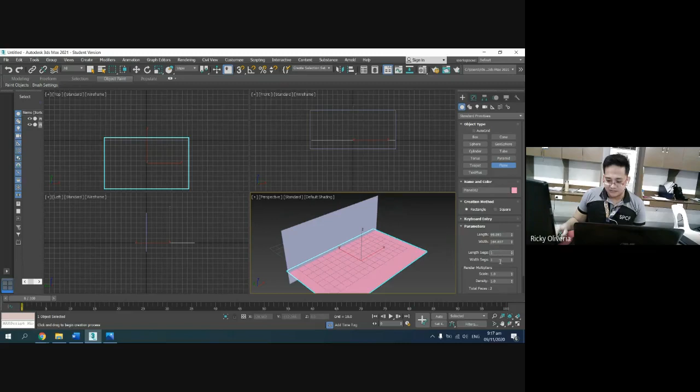We have a reference image. So here, I'm going to switch the length segment to 1 - why? So that the lines disappear. Then I'll have another one here. Okay, then this is also one. And I'll have here - okay, and that is also 1.

So I have this kind of shape for the plane. This is like what we're doing - it's like these are the walls and so on, but inside here, this is the area where your model will be modeled. This is where our object will be modeled.

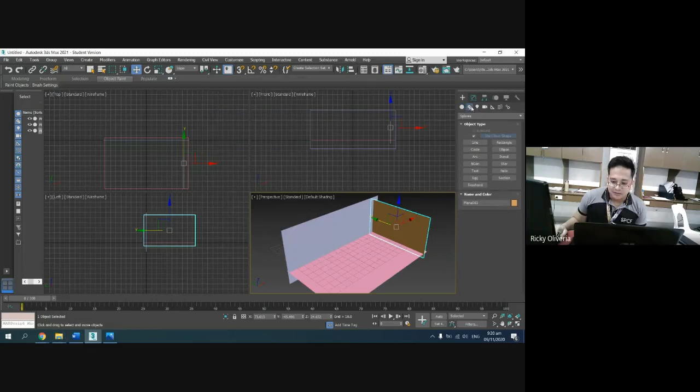Okay, so under the modify panel, the height would be - it's too big if I use 517, it's too big. So instead, we round it to the nearest hundreds or tens. So the height and width - let's start with width, it would be 35.9.

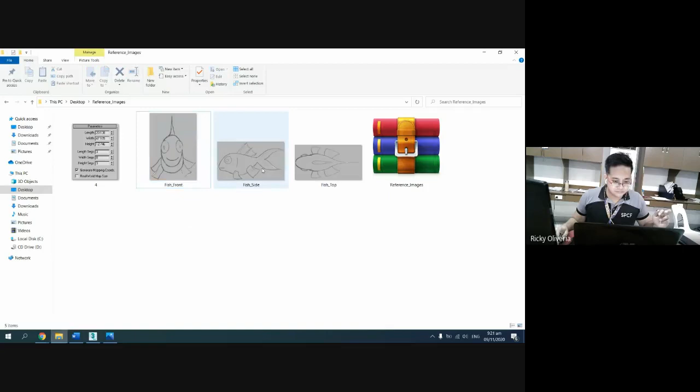So we don't need to copy the right part or the left part anymore. Let's see the details. So this is the height, 47.2, and the width is 82.

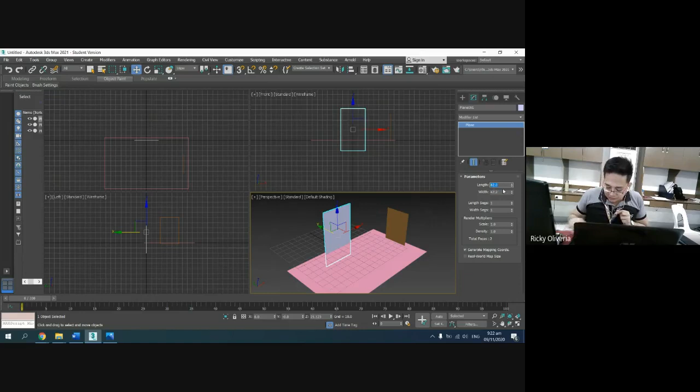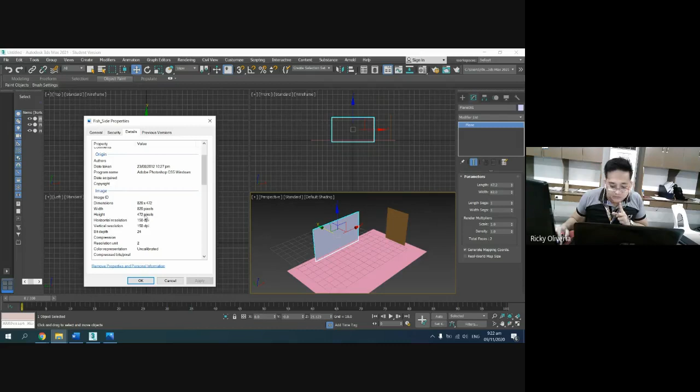Wrong, it's reversed. This is... okay, and for the last one, 82. So 82, 47, correct. And the last one, this one, it would be

details with 81.9. This is 81.9, and then 42.9.

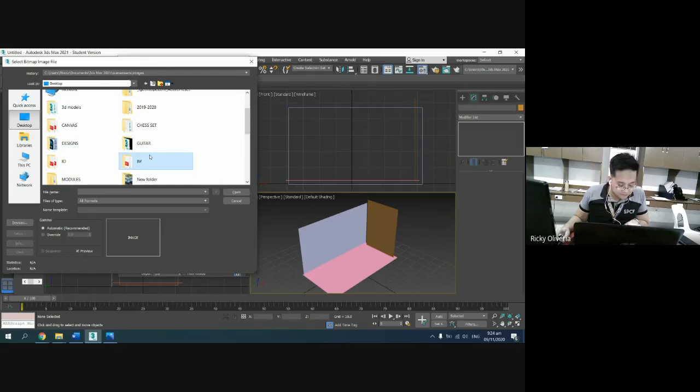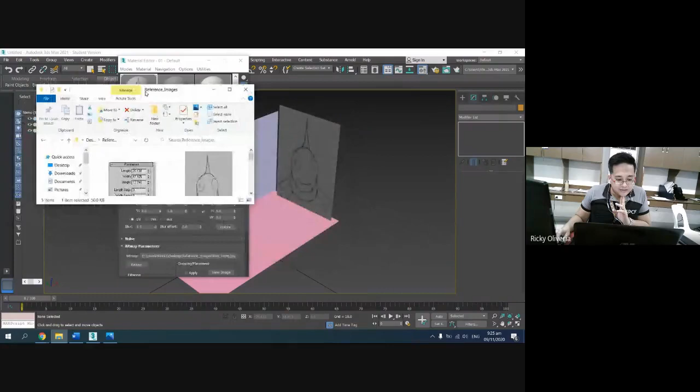Let's find the reference images. Where is it? Front. So let's drag it here. We're going to compare this to our image from earlier. If we compare, they're the same, because we follow the same dimension.

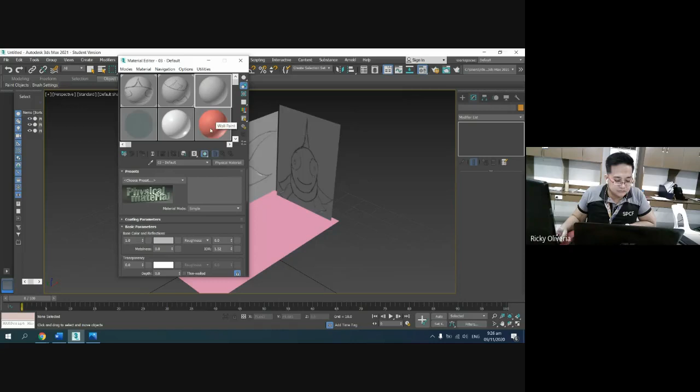Okay, since that's fine, let's have this one, Physical Material again, and here, have Bitmap. This one too, in here. And the last one, Physical Material, then okay.

Okay, any questions so far? None?

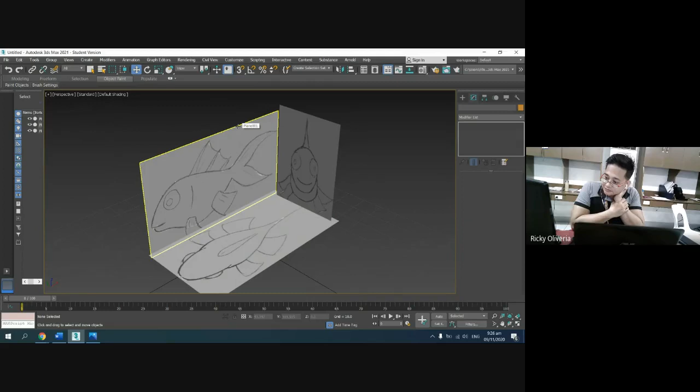Okay, now once we're okay here, what we're going to do is put this at the center. Now we're going to have a box - we're starting to mold our fish.

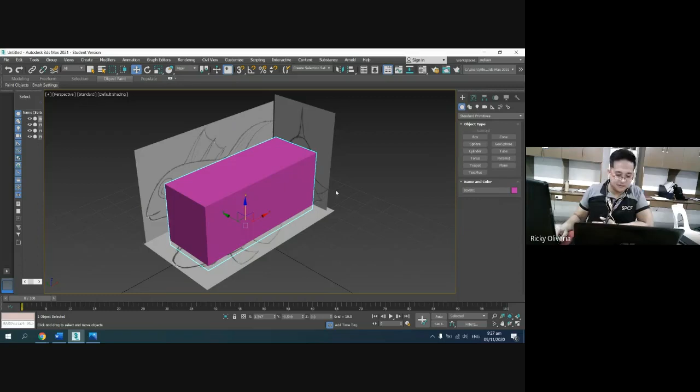So in here we have a box. Any size will do. Okay, so let's change the color first, it's too bright. Okay, here.

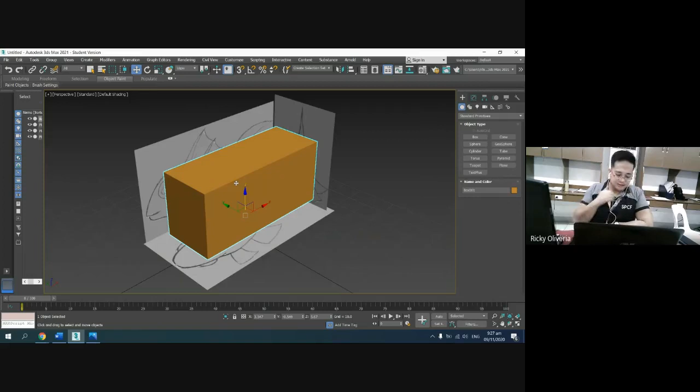This one, we're going to follow this. Okay, but using the absolute value now, so we won't take the decimal point. So let's have 20, 47, and 12.

Okay, click on the box. Let's have 20, 47, and then let's have 12. Okay, then segments would be 3, 8, 3. So this is the segment.

The length is 3, the width is 8, and the height is another 3. My mouse is lagging.

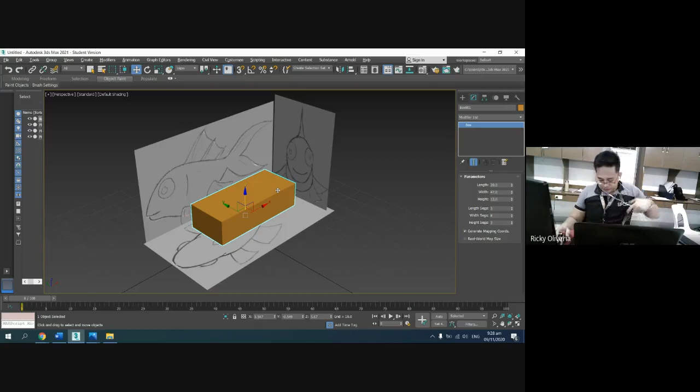Okay, now for you to see, for you to view your segments, hit F4. Just F4 so we can view and see the segments. Now what we're going to do is rotate this by 90 degrees.

So here, let's see what's moving - it's the x-axis. So switch this to 90 degrees so it stands like that. Okay, then that's it.

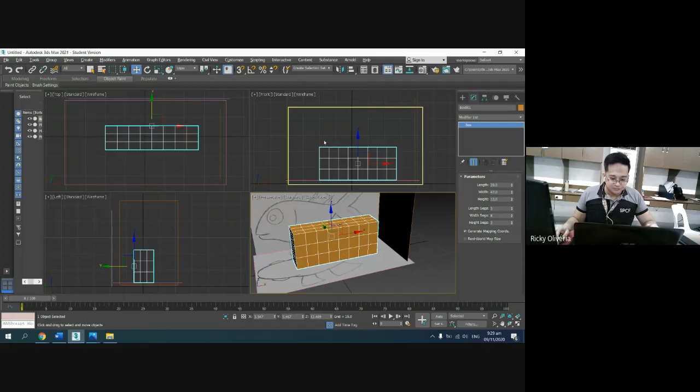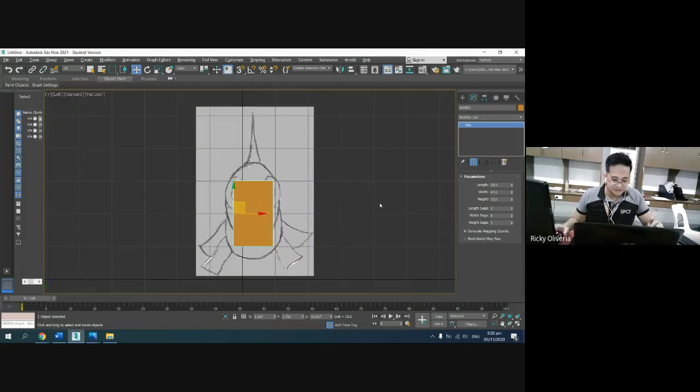But on this left view, let's maximize it so we can see it better. So here, it's in wireframe, so let's use flat color so we can see this. Then we'll just place it here in the middle.

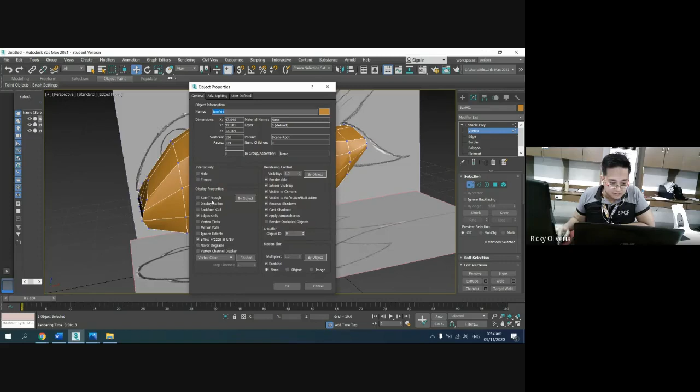Ito na. So, kapag tinanggal natin yung object properties na tinanggal natin, okay, yan siya. Okay, so next, balik lang ulit natin siya.

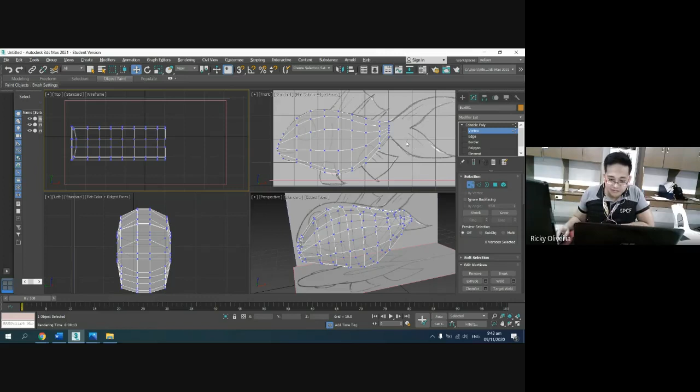So, since okay na tayo dito, ibabaw naman. Okay, question so far? Wala. Okay, hindi muna natin ito i-delete kasi kakailanganin pa natin yan later on, no? Okay, so here, ito naman tayo. Gawin natin flat color ulit to.

Let's access the wireframe, F4. Okay, so ito siguro ang gagawin natin is we are going to have this at the middle. Pagtikitin lang natin siya, ganyan. Okay, tapos here, we could do this.

Okay, as you can see, hindi pa rin naging exploded yung mga wireframe ko, no? Kasi I am following the one direction at a time na how are you going to model this, para at least hindi magkakaroon ng explosion yung wireframe natin. So here, careful lang ako na hindi sila mag-overlap. So this will do.

And then here, ito rin. Okay, so here, once na okay na, pwedeng kunin natin to, ganyan natin. Okay, now to check this, ito na yung nagiging itsura niyan ngayon. Okay, compare mo kanina, no? Okay, medyo iba na yung itsura niya, no? Okay, now here, since okay na ako dito, ito kasi babalikan pa natin to.

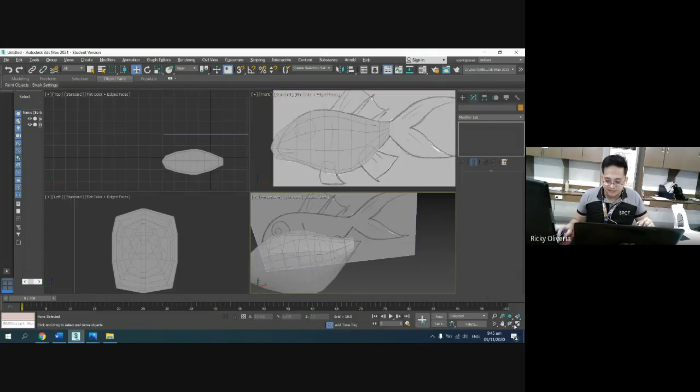Now, what I'm going to do is I am going to slice this at the center. Kailangan i-slice ko siya sa center, since yung kalahati parehas lang. Okay, so paano yun? I-click yung object natin. Okay, under polygon, you'll see slice plane. Hanapin lang natin sa slice plane. Yan, ang ginagawa ni slice plane is it would going to slice the object that is currently selected.

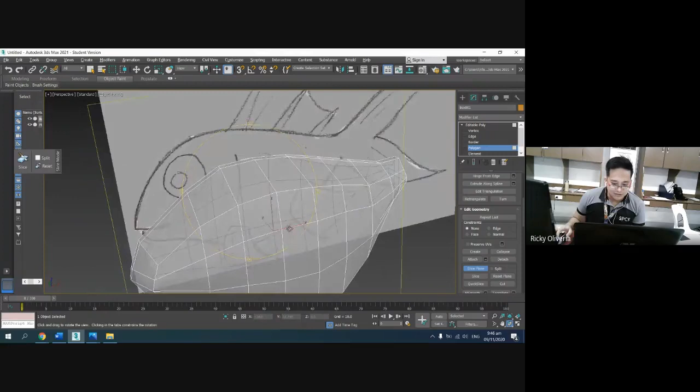So halimbawa, ito, look at this one. Yung parang square dyan, yan yung gizmo natin. Yan yung mako-consider nating knife, yung knife natin. So look at this. Ayan, so halimbawa, all my polygon. Okay, Control A ko lang siya para lahat selected. This my slice plane, this one.

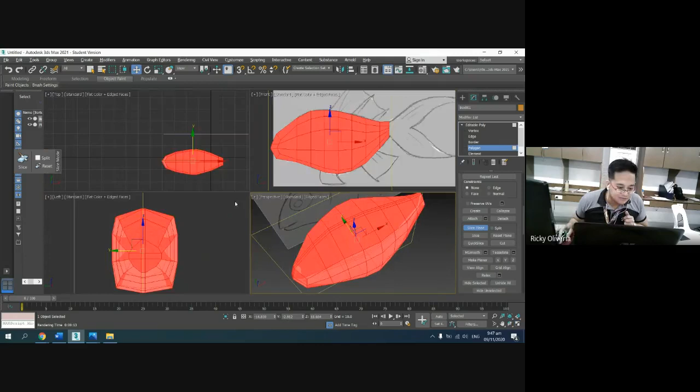Ayan, oh, look at this. So, kung mapapansin natin si slice plane, ayun, oh, yung gumagalaw. Yan yung tatamaan niya, ibig sabihin yan yung makakat niya. Lahat ng selected natin, makakat yun. So ito, kukunin ko lang yung parang bandang gitna niya. So for me to have this at the center, pwede kong tignan si top view. Okay, para mas center, pwede namang estimated lang. Okay, walang problema, okay so here, then I'll just click slice.

So tignan nyo to, example din. Pagka ang slice kasi, ayan no? It would simply slice, no, as it is. So click ko lang, slice. So, tanggalin ko na. Ayan. So magli-leave siya ng

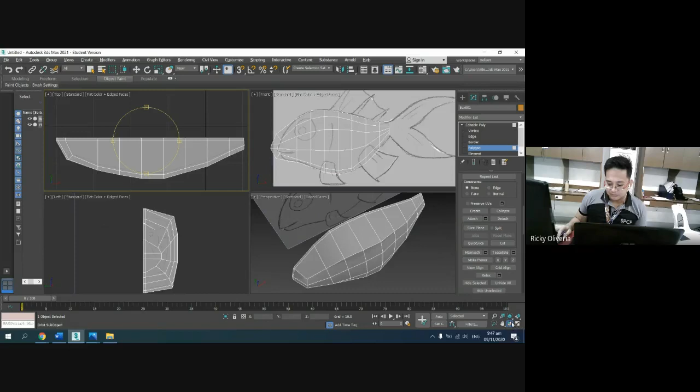parang another wireframe, no? Okay, once done, select ko yung kalahati, this one, then I'll simply delete this. Make sure na walang matitira. Okay, what will happen is, ito na yung itsura niya ngayon. Yan yung itsura niya ngayon. Okay?

Now, using vertex, no? Pwede kong palitan to, pwede kong habulin to, okay lang, pwedeng okay naman na yan. Since kasi ginalaw natin sa taas kanina, so mag-iiba talaga yan ng konti.

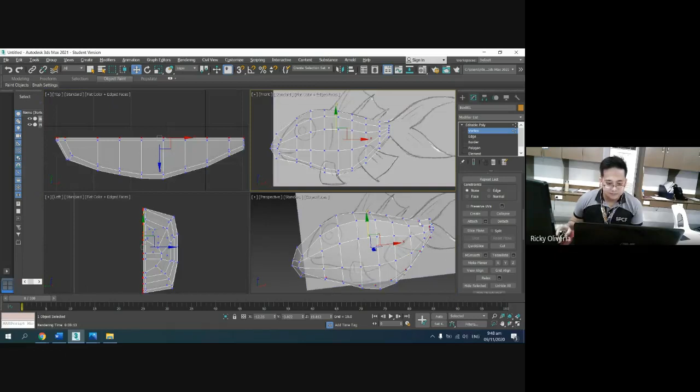Okay, now I could now drag out the tail, yung buntot. Gagawin ko na ngayon yung buntot. Okay, so here, so using the perspective view, no?

So I would have this, oops. Okay, so sinelect ko yung kalahati. So I could have, tansya lang to, no? I could have extrude this into 4 times, no? Pwede ko siyang extrude ng 4 na beses. So here, titignan natin yung haba ng pagkaka-extrude natin in here sa front view,

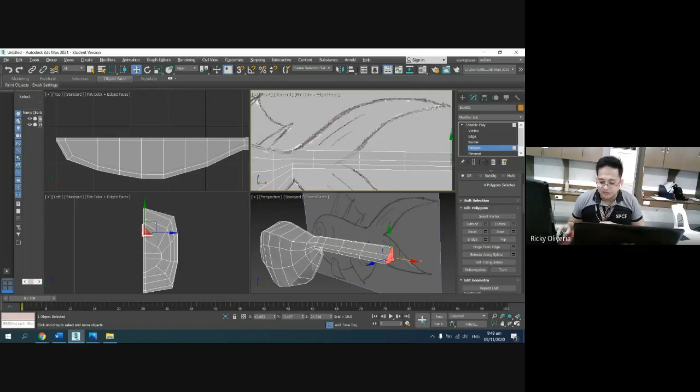which displaying the side of the fish. Then, yung extrude natin, ihilahin ko siya dito sa perspective para makikita natin. Okay, so extrude. 1, 2, 3, and 4. Yan, so you could have 3, you could have 2, pero baka kasi medyo mahirap. Mahirap na siyang i-bend pagka ginawa nating 3 less than 4.

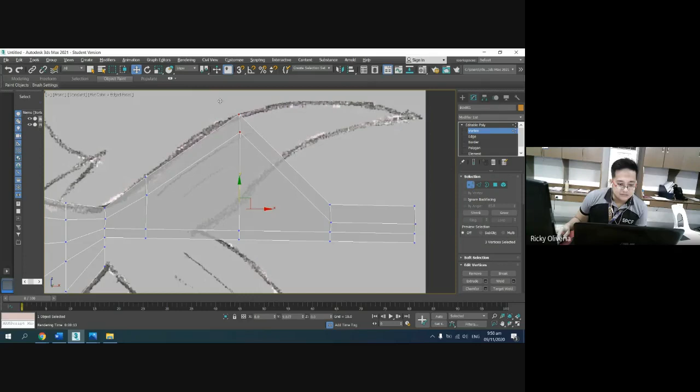Okay, so next is here, mold na natin siya kagaya ng ginawa natin dun sa katawan. So using vertex, just going to move this. Ay, dalawa sila. One.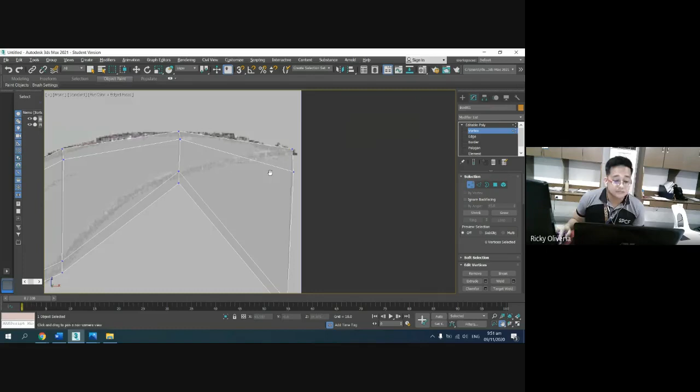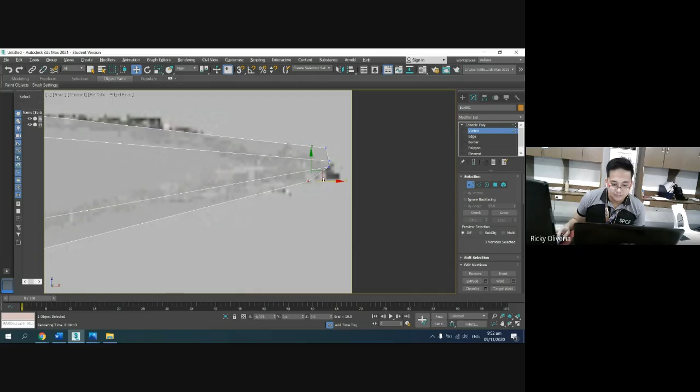So here, magkakaroon tayo ng overlap dito. So kailangan natin gawa ng paraan to. Okay, so ito is lagpas lang natin ng konti yan. As long as hindi sila mag-overlap. So here, okay na tayo dito. We could do this.

Okay, next is yung other naman, no? Ganon din yung procedure dyan. Okay, ganon din yung procedure. So, we're going to select this again using polygon. This. And then, using again, extrude.

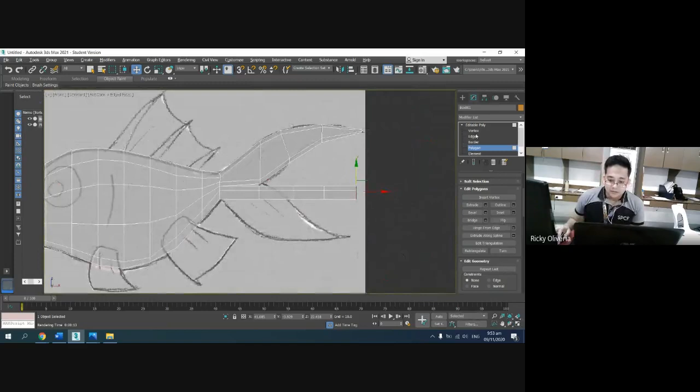Tignan ulit natin siya dito. So, 1, 2, 3, 4. Ito naman, no?

Ito kailangan hindi sila mag-overlap. So, pwedeng ilagpas mo ng konti, pwede rin pantay. Okay lang kahit hindi natin tamaan masyado yung ano natin dito.

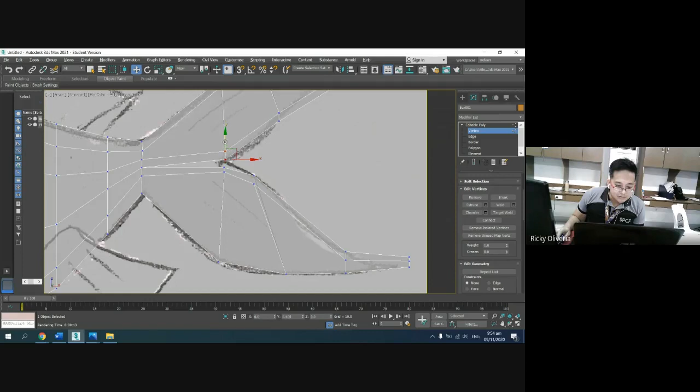Okay, so once done, ganito yung magiging itsura niyan. And ito yung itsura niya sa perspective natin. Okay, so here,

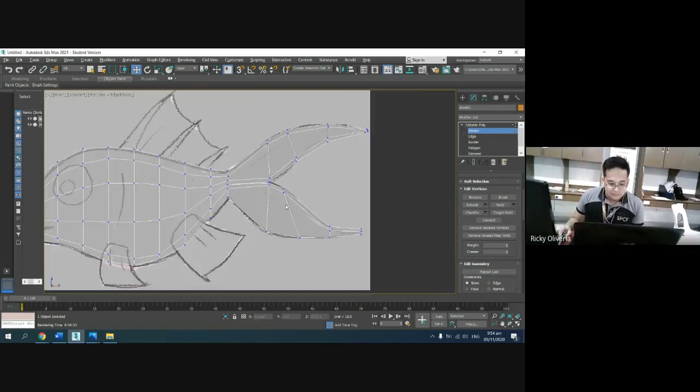Naririnig nyo ba yung kanta ni Ma'am Liz? Ang pangit, no? Lakas na daw.

Okay, so, after this, okay na, no? Pagka tinignan natin siya, object properties, no? Pagka tinanggal natin siya sa pagiging see-through, ayan na siya, no?

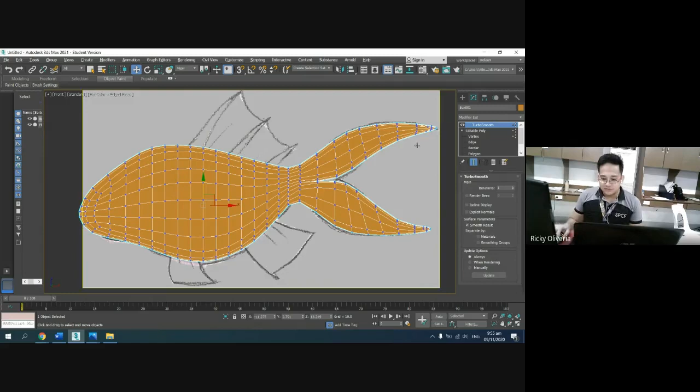Now we will apply a modifier para maging makinis yung model natin. And this modifier is called Turbo Smooth. So, Turbo Smooth, where's that? This one, no? Yan. So, once we apply a Turbo Smooth, ayan siya. Okay? Ayan na siya. Okay?

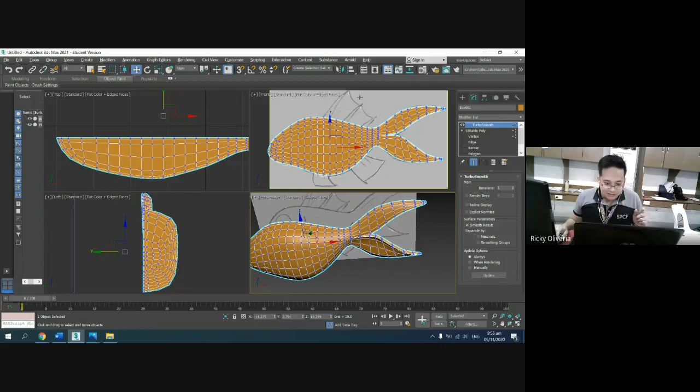Since yung kalahati niyan parehas lang, hindi na tayo mahirapan. Okay? Now, kunin natin tong ilalim at yung ibabaw. I-activate natin yung Turbo Smooth. Ayan lang, click lang natin yan.

So, balik natin yung object properties natin into see-through. Okay, halos pare-pareho lang yung way kung paano natin huhugutin itong mga ito. So, how? Dito sa ilalim, kunin natin muna ito. So, hindi natin siya pwedeng kunin dito kasi magdidikit siya dun sa kabila pagka dinuplicate natin. So, instead of kukuha tayo dito, gagawa tayo ng panibagong wireframe.

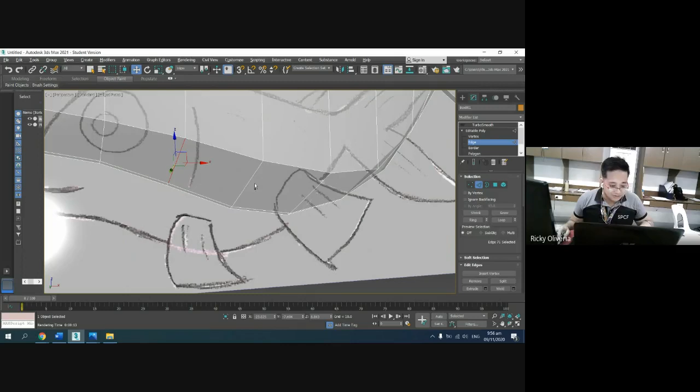So, using edge, let's have this one. Hold control para ma-select natin yung dalawang yon. Then, we could use connect. Yan, no? So, yan siya. Meron na tayo. Okay, so, paano kung dalawa yung kailangan natin kunin? We could use connect settings then two.

Okay, since hindi dalawa ang kukunin ko, pwedeng dalawa yung kunin nyo, pwedeng isa lang. So, dito ko na siya kunin sa edge dito. Dito ko na i-extrude yung fin niya, ito yung fin niya dito. So, using polygon, extrude tayo. This one. Kahit mga tatlo lang siguro. 1, 2, 3. Ayan, so once extruded, ayan siya.

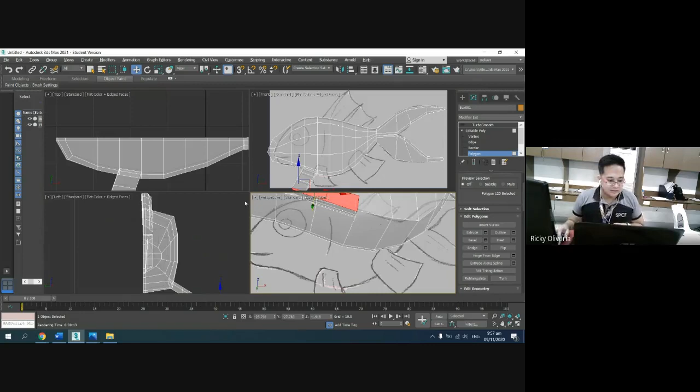Masyado palang maano yung ano. Ito dapat banda sa may ilalim. Okay, so ulitin lang natin, dapat yung edge dito, hindi ko na-tansya. Connect. So here, I could have polygon ulit. So extrude 1, 2, 3.

So here, and using vertex, I could just adjust this, here, here, here.

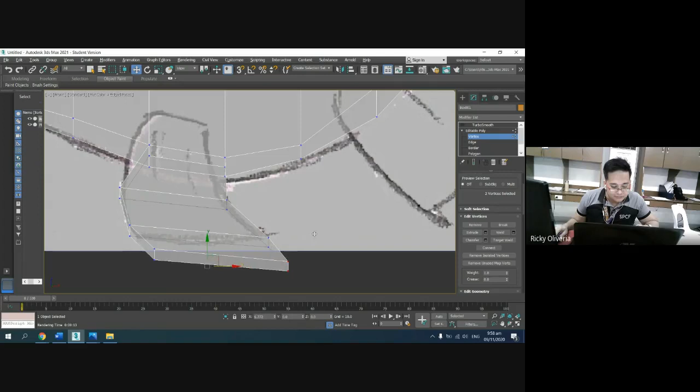Tapos, pwede nyo na siyang tignan sa Turbo Smooth kung ano magiging itsura niya. If you want a pointed type nung fin, pwede naman, no? Nasa sa inyo, pwedeng gagawin nyo doon yung fin nyo pag ganun, yung model nung polygon nyo pag ganun.

So, yan, okay na ako dito. Then, tanggalin ko ulit yung Turbo Smooth niya. Next ko itong ilalim, so kunin ko. I could just get the edge of this. Pwede ko namang iurong yung edge na ito. Okay, I could have the vertex dito, medyo nakaurong, na hindi maapektuhan yung model ko.

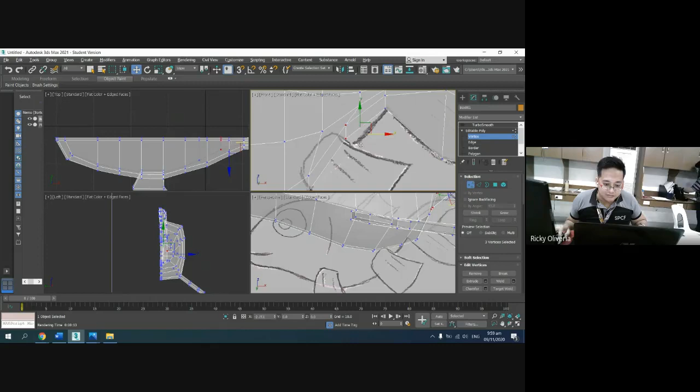Okay, then ito rin, so pwede ko rin iurong ng konti ito. So here, I could now have the edge of this, ito, and ito. Then I'll have this one connected. So, balikan natin dito, ito siya.

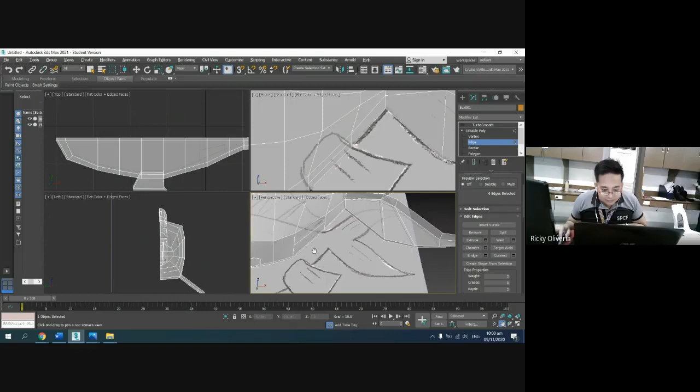Okay, so nakit ko lang ng konti doon, tapos medyo lumubog kasi yan, may lubog yan. Tignan natin mabuti dito, what will happen? Kasi baka lumubog yung model na yan. Ito yung sinasabi ko, kaya dapat hindi natin siya masyado... okay, so dapat proportion pa rin, baka kasi malukot yung part na yun.

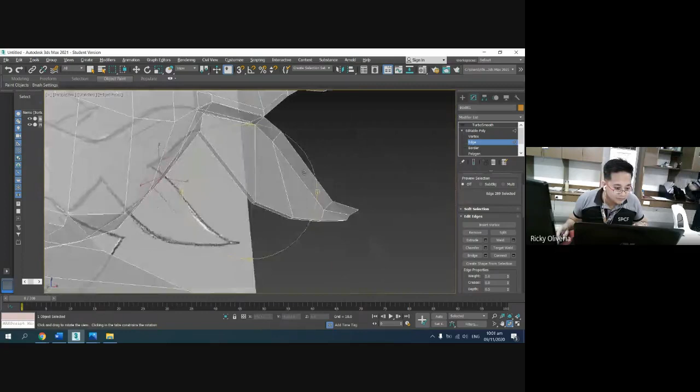So here, yan, pwede na yan. So ito, from here, pwede na tayong humugot ngayon ng isa pa. Extrude ulit natin ito, 1, 2, 3. So 3 lang, pwede na siguro yan.

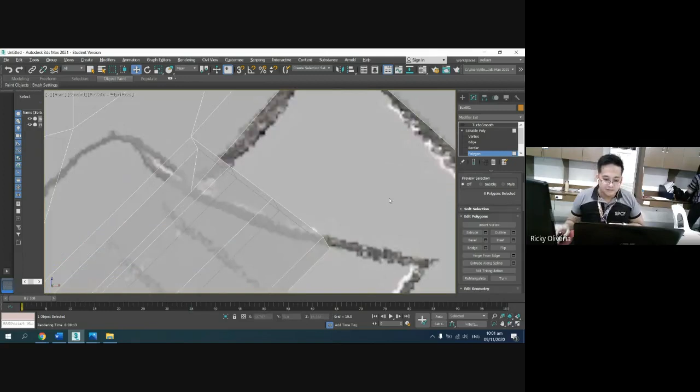Here, balikan natin to, then vertex ulit, we could do the positioning na. So let's say, for example, ito, position here. Okay, again, pwedeng ibang style ng fin yung gawin nyo, nasa sa inyo yan. So, this is just an example on how you are going to pattern it. Pero nasa sa inyo kung anong style ng fin yung gagawin nyo. Walang kaso kung halimbawa pa-heart yung fin o kung ano.

Tingnan natin pagka tinurbo smooth natin kung may problema siya. Okay, I don't think na merong problema sa ngayon. Okay, kaya na siya. Okay, and then yung upper na. Wala, okay, balikan ulit natin to.

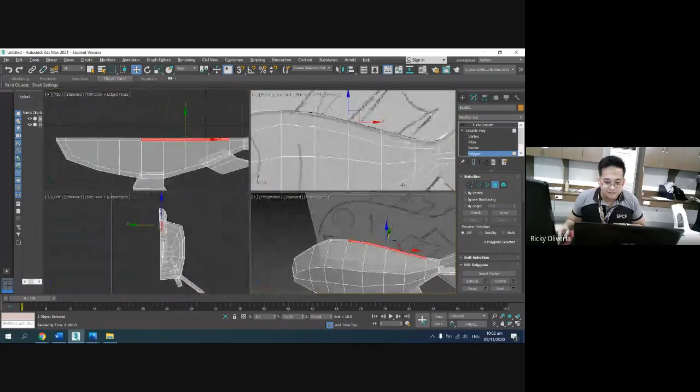Here, hindi na natin siguro kailangan ng another kasi meron na siyang paghuhugutan. Ito na, okay, so we're just going to select the polygon na lang. So, ito. 2, 3, 4. Tignan natin sa left view kung yan ba yan? So pagka extrude natin, kung siya ba yun. Okay, I think tinamaan naman natin. So, 1, 2, 3. Yan. And then, using vertex here,

Okay, so pwedeng ganyan, no? So, what I'm trying to do is, gumagawa ako ng parang pattern ulit, no? Yung fin ko.

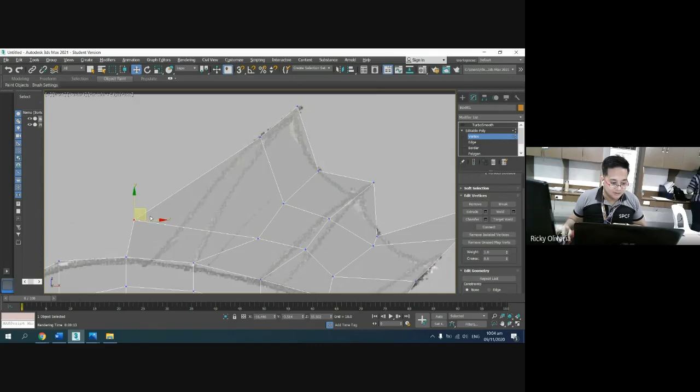You could do other, no? Pwede kayong gumawa ng sarili nyo pattern of fin. So, yan. Pwede mas mababa, pwede mas mataas. Nasa inyo. Pagka tinignan natin, yan ang tsura niya. Medyo, ano na siya.

Okay, so I think okay na ako dito. Medyo tanggalin ko na to. Okay, so yan, no? Lumalapit-lapit na tayo sa unang character. Tapos palalanguyin na lang natin. Tapos bobosesa nyo, Finding Nemo yung datingan.

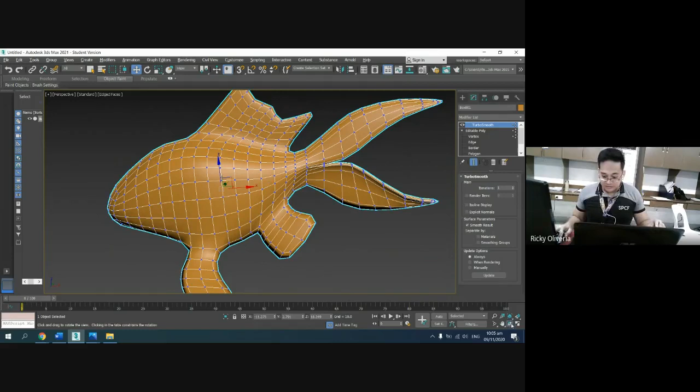Okay, so ano nang kasunod? May question ba? Wala naman. Di ba madali lang yan? Okay, so ang gagawin natin, kunin na natin yung kalahati bago natin siya tuluyang tapusin, no? Kasi almost done na to.

So, how are we going to copy the half? Tapos, kung ano yung adjustment natin na gagawin sa kabila, ganun din yung mangyayari doon sa kabila. So, that particular, what do you call this?

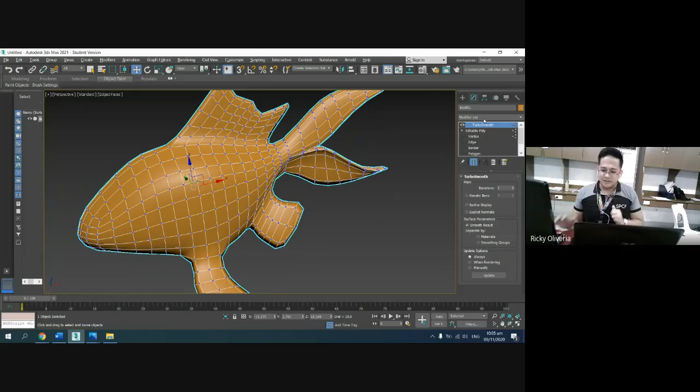Modifier is called symmetry. Meron kasi tayong tinatawag na mirror. Ang ginagawa lang ni mirror is kokopyahin niya lang yung kabila. Pero halimbawa, kailangan nating i-adjust yung fin, may iwan yung kabila, yung kopya. So we don't want to happen that. Gusto natin isang adjustment lang - kung ano i-adjust ko dito, yun na rin yung sa kabila. So for you to do that, gamit tayo ng tinatawag nating symmetry.

Symmetry modifier. Ang ginagawa niya is kinakopya niya yung kabila, kagaya niyan. Tignan niyo to. Ito yung kabila, ito yung another side niya. Halimbawa, ginalaw ko to para makita niyo - nagagalaw na rin yung kabila. So kung anong adjustment ko dito, nangyayari na rin sa kabila.

Going back to symmetry, yan no? Kinopya natin yung kabila, pero mukha siyang alimasag, mukha siyang crab. So titignan natin yung mirror axis lang. Let's try this - this is X, this is Y. Tignan natin. Most probably Z na yan. Yan na siya, pero parang malayo sila. So mirror lang natin ito.

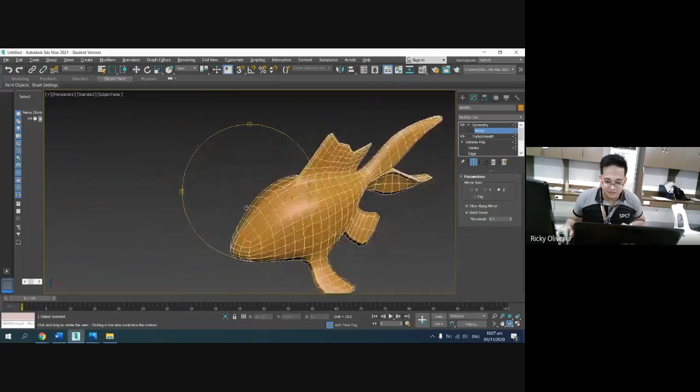Click lang natin yan, tapos idikit lang natin siya. Yan, tapos nakadikit na yan. Buo na yung isda natin, lalangoy na lang siya. Okay, yan no? Halos tapos na yan.

Yan, ngayon gagawin natin, lagyan lang natin siya ng mata, no? So paano yan? Pwede na natin gamitin yung sphere siguro. Ito, so gawa lang tayo ng mata. Yan.

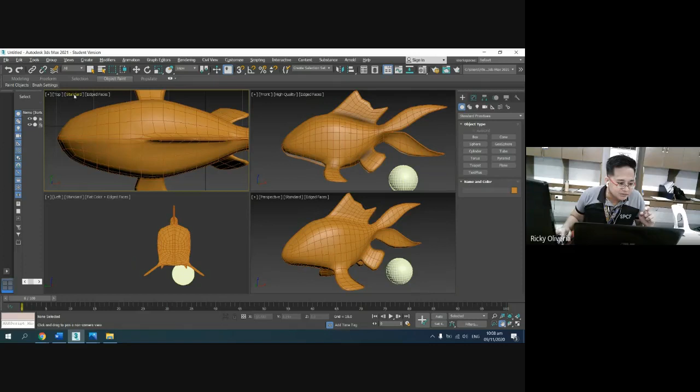Okay, masyado yatang malaki yung ginawa kong mata. So from flat color, gawin nyo na itong quality - yan, high quality na, para makikita nyo yung medyo false shading. High quality and the false shading. Tapos quality, yan, para may shadow ng konti. Ito rin - false shading, tapos high quality.

Yan, tingnan natin, ito malaki. Okay, syempre adjust natin yan ng konti sa gusto nating matanong, ano natin, fish natin. Pwede nyo rin lagyan ng bibig yan, ha? Ibabaluktot nyo lang ng konti yung, ano, tawag dito, vertex natin doon. Okay, so here.

So tingnan natin. Ayan, no? Let's say for example, okay na tayo dito sa mata na to. So copy lang natin siya, tapos palitan natin, let's say for example, thin. Tapos paliitin lang natin yon.

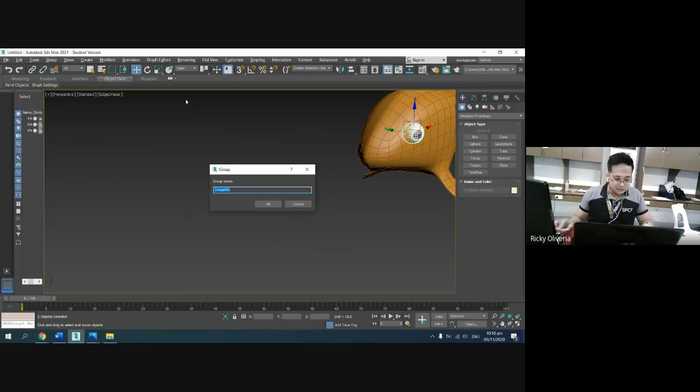Bitin natin, depende sa gusto nating eyeball nung cut natin. Pagka tinanggal natin yung wireframe yan, ganyan yung itsura niya, ganun din sa kabila syempre. So pwede nating i-group to para - this is group natin, this is eye. Para pagka pinapi natin siya, yan, dun sa kabila, okay, rotate lang natin yun.

Lalagyan natin ng kulay yung isda natin. So say for example, kahit paint na lang, isang example - make this yung parang paano ba gumamit ng paint kasi. Okay, let's say for example, this is red. Ano ba yung ginagawa ko dito? Okay, red - let's say gawin lang natin siyang stripe, no? Parang datingan, stripe na isda.

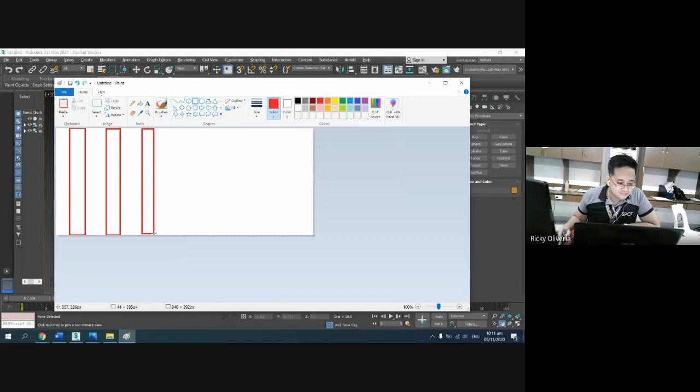Kasi may subject kayong iba na mapping, no? Dun, yung wrap around mapping. So this is just basic texturing, no? Okay, so let's say for example, this is red. Yung kulay, let's say for example ng isda natin is ano - black and red. So black. Yan, hindi ko na pinantay-pantay.

Okay lang yan, example lang naman. So, save as. Tapos lagay natin siya sa reference image. Let's say, okay, so siya si skin. Okay, so apply natin siya, using material editor. Okay, kunin natin to. Physical material.

One, under bitmap. Kunin natin to, yan, wrap around na siya. Tapos lagay nyo dito. Okay, so yan no? Nasa sa inyo kung ano itsura ng isda na gagawin nyo. Pero sa akin, ginawa kong yan, black and red, no? Example lang yan, no? So nasa sa inyo kung itsurang goldfish o kung ano.

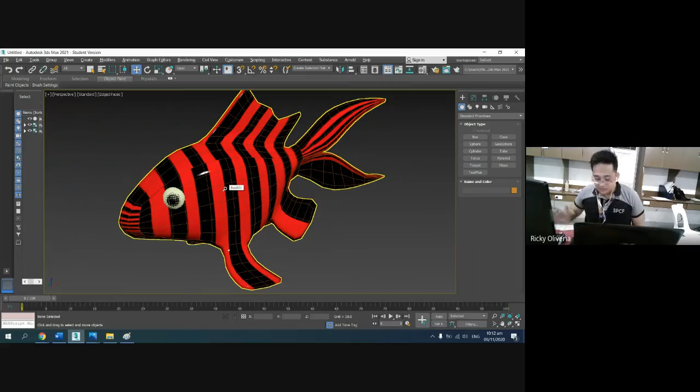Okay, so this is just basic example. Siyempre, habang ginagawa niya, do not forget to save, diba? Sa akin, hindi ako nag-save, kasi I could do this naman again and again.

Okay, so in your end, kailangan nagsisave as kayo lagi, nagsisave ng different progress, di ba? Itong ano natin dito, save copy as. Okay, so that ends yung ginagawa natin na fish. Later on, papalanguyin natin yun. Okay?